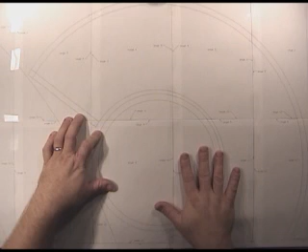Okay, as you can see, I've got the first strip and the second strip somewhat fitted together. I usually start at the middle and try to line the middle marks up, because as you go toward the edge, sometimes they don't fit up just exactly right. So what I have to do is just align the sheets so that they fit as straight as they can.

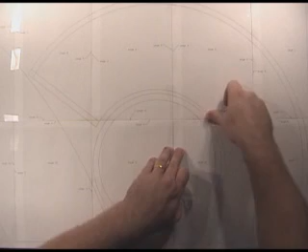Once I get the sheets pretty much lined up, then just tape the sheets together. What you want to make sure is tape on the lines that make the pattern, because what we're going to do after we get this piece assembled is cut around each piece.

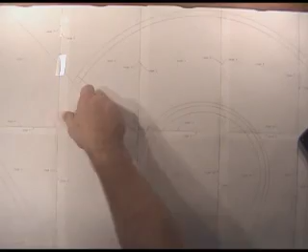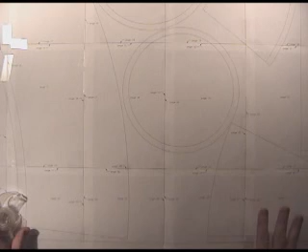Okay, here you can see I'm at the end of the pattern now. I'm finishing taping up the last edges. Everything fitted quite well. Got quite a large sheet here, 3 foot by 4 foot. It exceeded the size of my table somewhat.

But the next thing I want to do is turn this over and see if I can see the lines where the pattern comes. You may not be able to see them, but I'll be able to see them fairly well, and all I want to do is make sure I tape down all of the back edges, because when I start cutting the pattern out, I don't want any loose edges hanging around. This gives it a little bit of reinforcement so our pattern doesn't come apart while we're cutting it.

Okay, I've got all my reinforcements taped up now. So the next thing I want to do is flip this over and actually start cutting out the pieces.

Now the reason why I want to cut the pieces out is so that I can tape them onto the metal and cut along the edges, because I don't want to have all this waste paper in the way so I can't see the metal. Plus it'll get in my way.

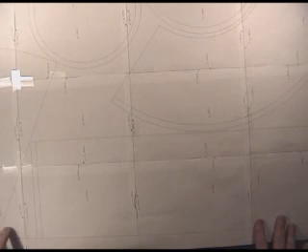What we're doing is we're going to use this similar to a dressmaker's pattern. So we're just going to be using the pieces of the pattern that are inside the pieces that we intend to cut out. I believe that in this pattern you can see the frustum that makes up the lyne arm.

I'm going to take the pair of scissors and I'm just going to manually cut this piece out of the pattern, staying as close to the edges as I can. This is actually going to be the piece that I tape onto the metal to cut around.

You'll have to watch for some of the intersections because they can be a little bit tough. But as you can see, my little bit of misalignment isn't really going to make that much difference when I start cutting the pattern out, because I can make any corrections I need with the scissors. We want to be careful that we don't cut up any of the pieces of the pattern that we're going to keep, such as that round pan that I just ran into.

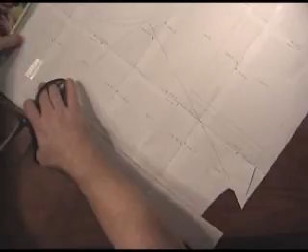Once this is rolled up, this makes the half inch diameter piece of pipe that makes the end of the lyne arm that connects to the condenser. Let me turn this around so I can see this.

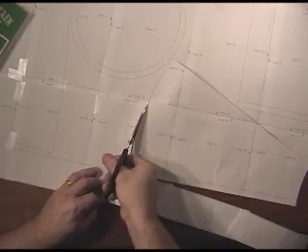Now if I leave any little extra danglies hanging around, I can always go back and clean them up. A lot of times what I'll do is I'll cut a half inch or so around the pattern and then go back and cut the pattern out.

I just wanted to show you one example of cutting out a piece of the pattern. So if I've left any edges, I can always go back and clean those up later. I've got this one little edge here that I didn't get real close to, but with a little bit of careful trimming I can actually go through and clean that up to where it's going to be about as close as I can get with paper pattern.

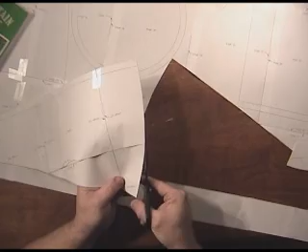And that's an example of cutting out one piece. Occasionally you'll run into a section like this. As I was cutting this out, I found that this one was disassembled across this one edge.

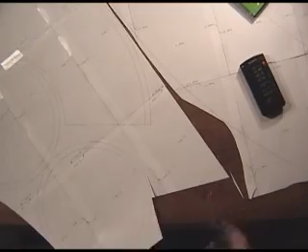So what I want to do is make sure that every place the paper comes together on part of the template, I go ahead and tape it up to make sure it's as strong as I can get it. That will allow me to cut it so there's no loose edges hanging out that would come apart while I'm trying to tape it down to my template.

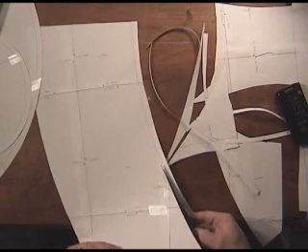As you can see, I'm working on the last piece here. I've just about finished all of the things. Next thing I have to do is just clean up my mess a little bit. The next thing we'll be moving on to is putting the pattern on the metal.

And that completes the pattern. I'll lay this out so you can get a kind of a look at how well the pattern comes together once it's cut up.

And here's an example of a round piece that was cut. So you see they actually make fairly nice patterns. The round pieces all being different sizes, they're fairly easy to keep track of which goes where.

I laid this sheet out so that it would fit a 3 foot by 4 foot sheet. So whenever I start putting these patterns on the copper, I'll end up laying the pieces out in almost the same pattern as I have in this drawing here.

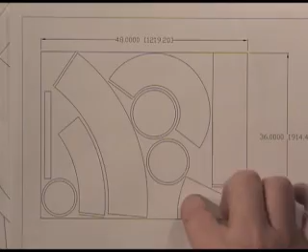The CAD program was very nice in that it would allow me to define these all as individual objects. Then I could move them around, rotate them, and basically figure out what pattern I could most efficiently put on the sheet. Even though it seems like there's a lot of wasted copper in here, it really won't be wasted in the long run. We'll figure out something else to do with it.